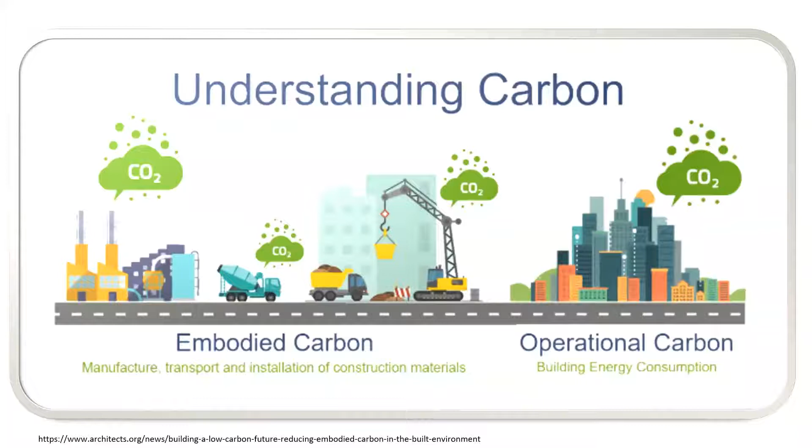Okay, so when we talk about EPDs, what they are is labels. It's considered an eco label that quantifies environmental information about the life cycle of a product or even a service, and it's designed to enable comparisons between products that fulfill the same function. It's often referred to as an environmental nutrition label for a product, defined under the ISO 14025 standard.

EPDs are independently verified, and that's an important component. The overall process for developing EPDs, the international standards they're based on, as well as the product category rules, are very clearly transparent and identified, and then the process itself is verified.

Now, another important footnote when we talk about materials that fulfill the same function: one of the key caveats is that the materials have to fall under the same set of product category rules, and that is a really important area in terms of pavements, because there's a different PCR for asphalt mixtures, ready mix concrete, and interlocking concrete pavers.

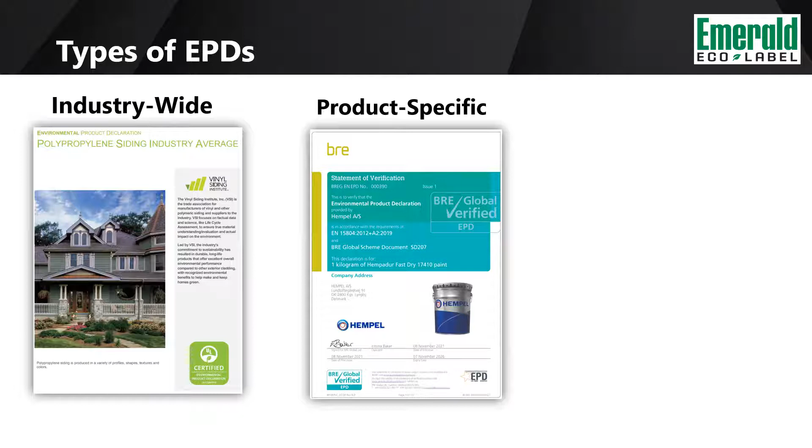The next example is going to be a product-specific EPD, and this one is a paint made by Hempel. This is a particular product that's made at a couple of factories around the world. And so this EPD is an average of those two factories, but it does apply to this specific product by the specific manufacturer.

And then the third type is a product-specific and plant-specific EPD. This example is one of my favorites because, boy, I wish I had a private jet that I could say I've got an EPD for, but this is an EPD for a specific product, a specific model of jet manufactured at a specific facility. And when we talk about EPDs for asphalt mixtures, these are going to be both plant-specific and product-specific EPDs. Similar to, but not quite as exotic as the private jet.

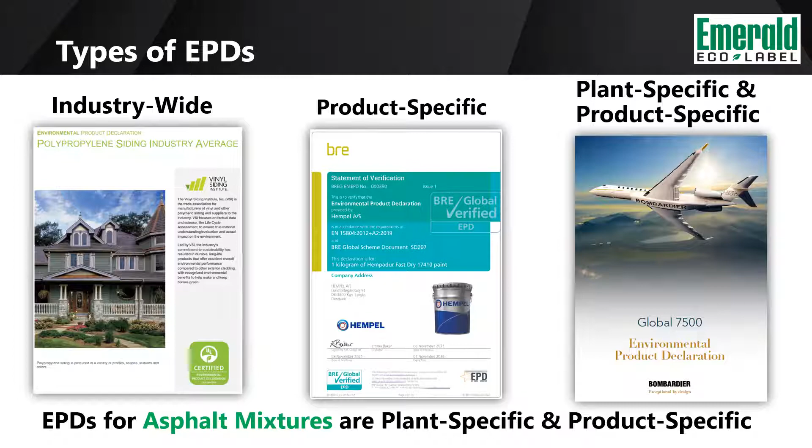So the scope is an important part of the EPD. What is the scope? It's not just the plant operations. That's fairly easy to calculate. But it's a full life cycle inventory over the scope of cradle to gate. So that means upstream processing of raw materials, transportation of those materials to your plant, and then plant operations themselves.

And when we talk about upstream processing from the cradle, for aggregates this is simple in terms of crushing and screening rock, blasting it out of the ground and all that sort of thing, and then the manufacturing process. On asphalt binder, the supply chain is more complex. You've got petroleum extraction out of the ground, transporting that petroleum to refineries, refinery operations, transporting finished binder to the terminal operations. So all this stuff is included in that upstream A1 portion.

And hold on just a sec. My 3-year-old wants to say something. Okay, sorry about that.

Okay, so the other life cycle stages beyond that are not included in the EPD, mostly for a couple of reasons. One is ISO doesn't require you to go beyond cradle to gate, so that's the basic. And the reason for that is the manufacturer or mix producer doesn't really have a lot of control in most cases over these subsequent life cycle stages. You end up having to use scenarios to model what happens beyond the gate of the plant, and it ends up being pretty generic information and not very insightful in the world of pavements.

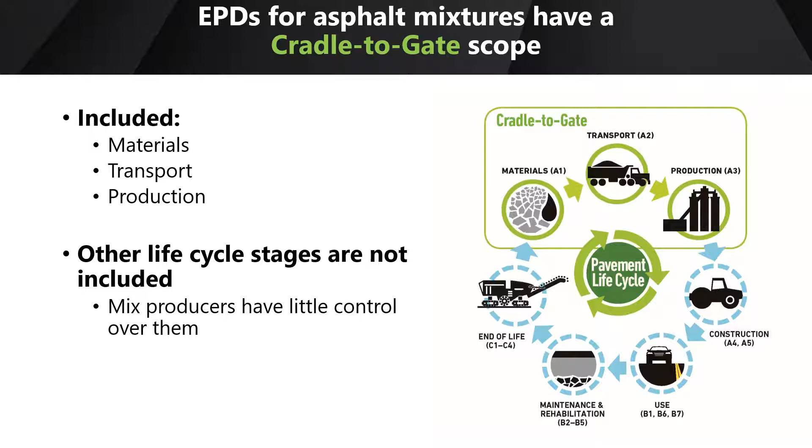But if you want to do that analysis, what you can do is use your EPD as a data source and plug that into a full life cycle assessment. So the manufacturer is providing those upstream portions, A1 through A3, with their EPD, and then an agency or researcher or whomever can fill in the assumptions for a particular pavement design, rehabilitation technique, or whatever it might be, to fill in those other life cycle stages.

So the one that's gaining a lot of attention right now in our space is FHWA's LCA Pave software. It's not software technically, it's an Excel file, but it's designed for agencies and for academics and researchers to be a relatively simple LCA software solution, so that folks can start conducting LCAs on pavement materials and pavement designs. And importantly, LCA Pave was designed from the very bottom to be able to take EPD data as an input to those full LCAs that folks might use for different analyses.

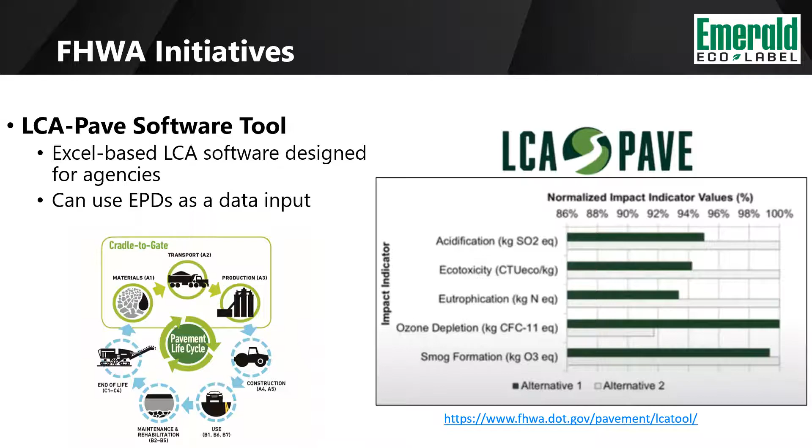So the other thing I want to mention, the last thing on background about EPDs, is we use it mostly to look at embodied carbon, or that portion of embodied carbon associated with construction materials themselves.

But it's more than just that carbon or global warming potential that's reported in an EPD. There are dozens of different impact indicators and resource use indicators and other pieces of information that are reported in the EPD. Some examples include things like acid rain forming potential and smog forming potential. And as a kid growing up in the 1980s, I remember a lot of concern about the depletion of the ozone layer. And that is mostly being solved right now because of global treaties and whatnot.

But there is information about those types of environmental impacts, and also a lot of information about resource consumption, energy consumption, recycled materials use, non-renewable energy and renewable energy use, even use of fresh water, for example. So EPDs have a lot of information. It's not just a carbon footprint.

That gives you an opportunity to look at trade-offs. Sometimes you may reduce one impact, but have an increase in another impact. And sometimes you have solutions that reduce everything. So it's really beneficial to be able to see those trade-offs.

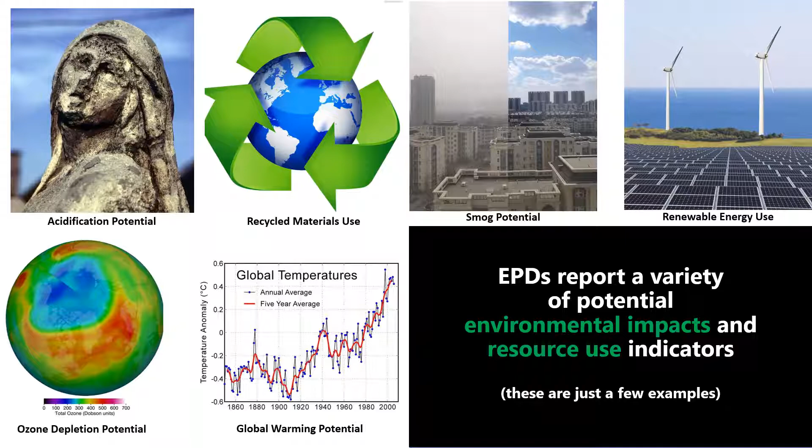So now I'm going to get into what I would say is the exciting part of this presentation, which is what's going on with policies and programs out there by owners and other agencies. And I always like to start this with the LEED program, because U.S. Green Building Council's LEED program was the first player in this space. When they developed the LEED version 4 standard, which went live around 2018, but they were developing it around 2013 or 14, they said, we're going to start requiring EPDs as a credit requirement. So there's a point you can get for a LEED project as a building owner or project team if you collect 20 different EPDs from 20 different products for your building.

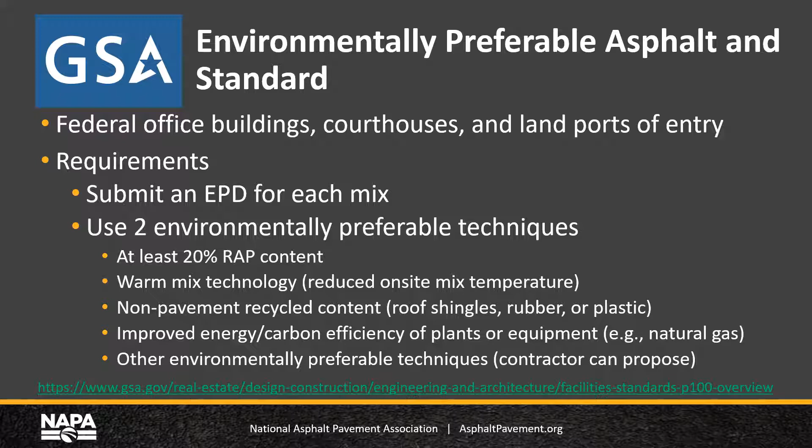I think it's a fairly good standard. It pretty well reflects where we are as an industry as far as being able to provide EPDs. It's not that hard to do. So you can do that for GSA. It's really kind of developing best practices at that agency level.

The other thing going on within the federal government associated with Buy Clean policies is with that executive order that I mentioned earlier, the White House Council on Environmental Quality, or CEQ, established a Buy Clean task force. They've been meeting for almost a year now. And what that group is doing is they're coordinating policy recommendations across federal agencies. So GSA is involved, and I've talked to GSA folks about this, they've certainly shared what their policy is with the task force and the other participants.

Federal Highways is involved, and from what I understand they've been fairly influential, which is, I think, a good thing. And then other agencies like EPA, Department of Defense, national parks, federal lands, all that sort of thing. We're expecting, I would say soon, some sort of policy recommendations out of this task force, but we don't have any clarity on when that will be, and we have no idea what is going to be included in those policy recommendations, but it's what we're keeping a really close eye on.

So then you have the bipartisan infrastructure law, and if you've been paying attention to this space, there's a number of new grant programs funded under that legislation. So these are grants that state and local agencies can apply for for transportation infrastructure. And most of these, when you look at the notice of funding opportunities that went out, they said they're looking to fund projects that incorporate lower carbon pavement and construction materials, and projects that use recycled materials or materials that reduce or reverse carbon emissions and that sort of thing.

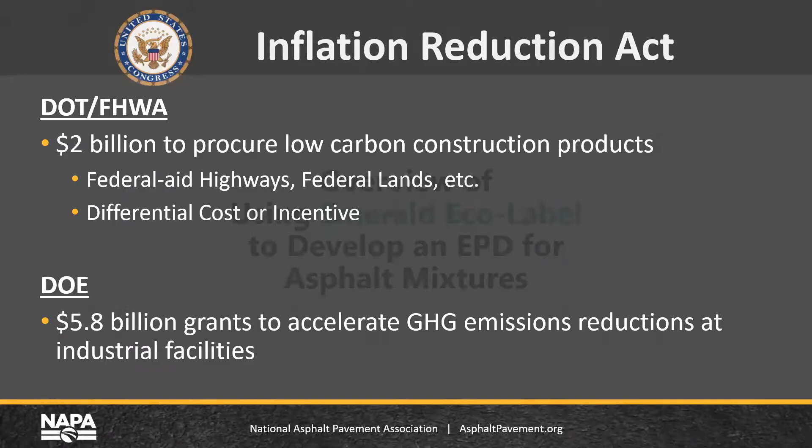So that's all what's going on. There's a lot going on, and there's even more that I'm not talking about because it's still in the planning stage and we don't really know what it's going to look like.

So let's talk a little bit then about, I'm just going to do a quick time check. Okay, I think I'm good.

What does it mean for someone to actually develop an EPD as a mix producer? And I'm going to cut straight to the chase on this. What we've done at NAPA, we have a full program, and there's a lot more embedded in this with development of product category rules, identifying a program operator, developing the underlying LCA. I'm just skipping over all that stuff. I could spend 20 minutes talking about it, but right now that's all you get. But what we've done after doing all those things, we put together this Emerald Eco-Label software.

This is a software tool for asphalt mix producers that allows them to very easily and very cost effectively develop verified EPDs. So the EPDs are going to be plant specific and mix specific. So this is for this particular mix design coming out of this particular plant. Can use it for pretty much any asphalt plant in the US.

We have a limitation right now with portables, but we're going to be working on getting that functionality put up in the near future. And then the software itself is independently verified, and we have the ability to audit the data that's in there. So there's a lot of veracity as far as what's going on and what the outputs of the software look like.

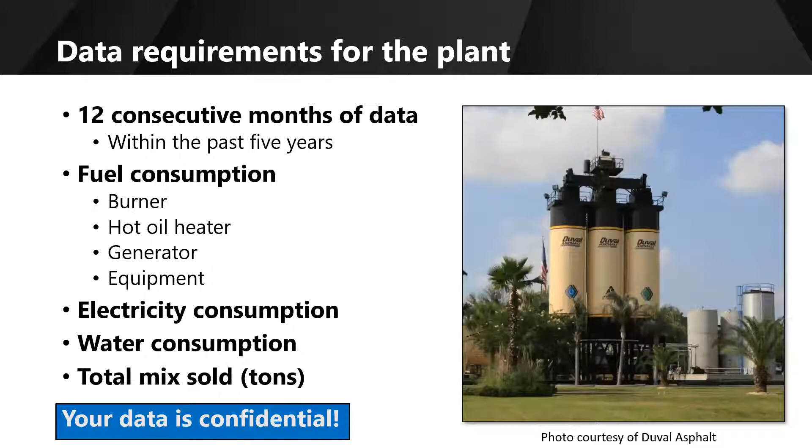So when it comes to the mix design, you input all of your suppliers and your materials, and you're going to input things like, well, what's your mix design to start with? How much aggregate, how much binder, how much recycled material, and do you have any additives? This could be your polymers, this could be your warm mix additives and liquid anti-strips and fibers and all that sort of thing.

And then importantly, where are those coming from? How far away from the plant are they? And what's the transportation mode? We have locations that bring in aggregates and binder as well by train or by barge or by ocean vessel. So we have data sets for each of those.

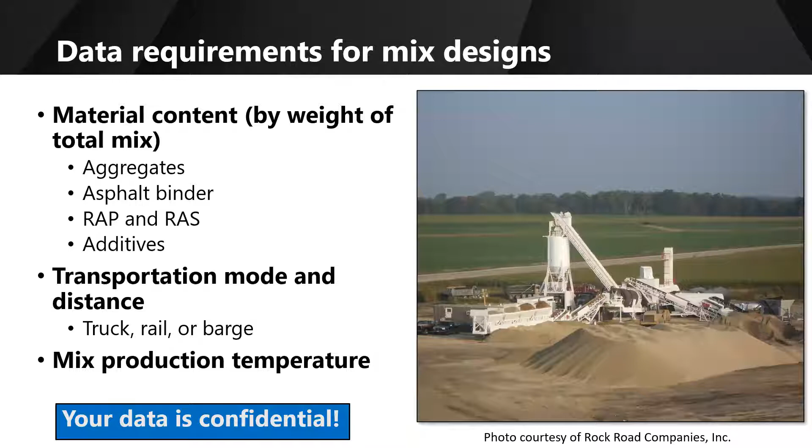We also collect the mix production temperature. We don't actually allocate energy at the plant based on the mix production temperature, so it's just going to be one number across the board. But in the name of transparency, we do report what that mix production temperature is, so the customer can see that.

Now, when we talk about all this data, the important thing here is that there's a lot of upstream underlying data in here for things like asphalt binder and for aggregates and for energy, right? These are very common materials. Everything that we're using is being pulled from the federal LCA Commons, which is like a central repository of public data sets. But we're missing data for a lot of additives. We have some data for like SBS polymer, for example, but some of the binder additives and mix additives, you're going to find data gaps for these sorts of things.

If you have a data gap material that's more than 1% of the mix by weight, you can't develop an EPD, and the example of this would be slag aggregates. I know the slag industry is working to fill that data gap. That's probably the biggest example. Or if you're doing cutbacks, we don't really have a data set for the cutback asphalt side for a cold mix, for example.

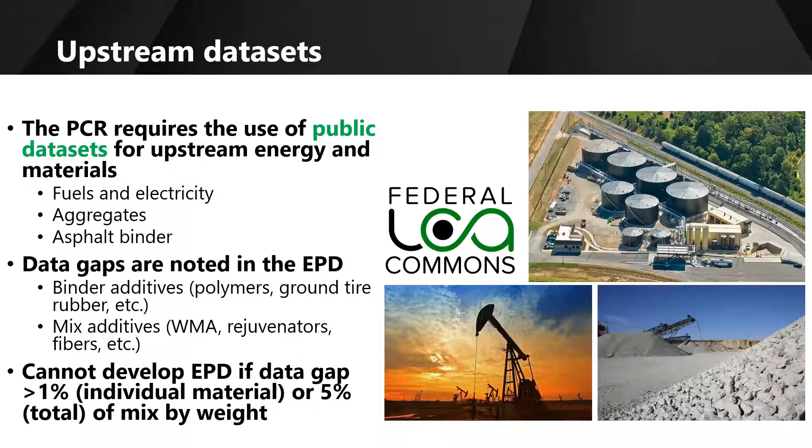So we're seeing interest broadly. We're seeing interest grow pretty rapidly by the industry. And this is in the first 5 months of this version 2 of the software that we launched in April.

We have exceeded the previous 5 years of published EPDs, actually more than doubled the number of published EPDs from the previous 5 years. So I'm going to stop here and turn things over to Richard, and he's going to talk about kind of what the future looks like.

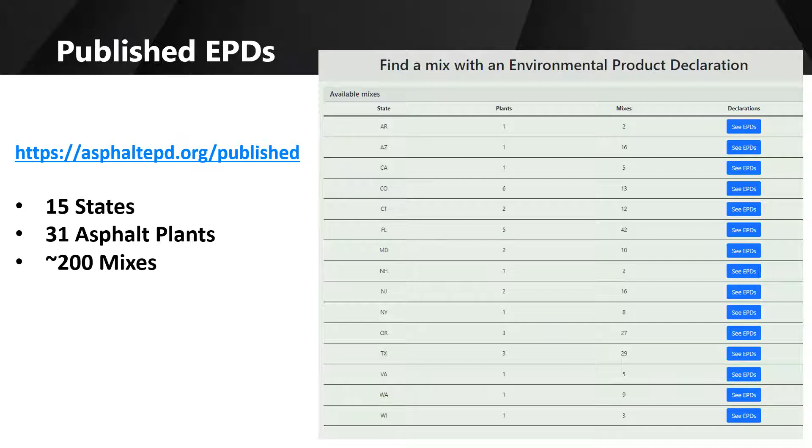One thing I will say about the last slide, just briefly, is the thing to focus on is that's published EPDs. There is an option for plants to create EPDs, but then not publish them. So there are more than just 31 plants across the country that are actively using the software, but some of them are figuring things out and learning a little bit about the program before they actively go out and start publishing EPDs. And so just because you may not see your state up here doesn't mean that it's not being used.

And so, like I kind of mentioned earlier, the state of this is changing rapidly. And one of the jokes Joseph and I commonly make is when we're doing presentations on this, we really can't send presentations too far ahead in advance, just because you never know when a piece of legislation or a policy statement is going to come out and drop, which could impact the way we do our work and the way we talk about this. And this is going to be a constantly evolving process.

One of the things that we're doing right now is looking at data quality and data gaps that are out there, and trying to encourage people to help us create a more full picture of the program and what the environmental impacts are related to asphalt. And so when we look at our program, we admit there are current data gaps with certain additives and things like slag, and we need those data gaps to be filled.

This is especially important in areas that are setting legislative thresholds and ceilings on what your global warming potential could be. We want to make sure that when those policies are set, we can have that ability to raise those or present a more complete picture of what the asphalt mixture does.

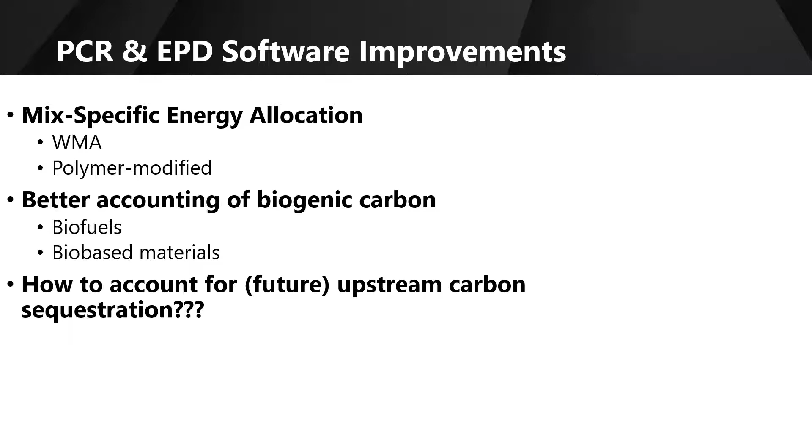I think that this area is ripe for research and specifically education. LCA for pavements is, I call it, a relatively new science. It hasn't been around two decades where people have been doing a lot of hard and fast research on it. So we need to grow intellectual capacity and expertise. And this includes in academia, in DOTs, and for industry as well.

We need to look at things like software development and bringing more and more transparency into these systems. The great thing about our product category rule is you can actually go to it and understand every single assumption that is made through the course of calculating the environmental impact of an EPD. And that's not necessarily true for everything that's out there.

We also understand that right now the EPDs don't account for the use phase, which if you have a high volume road currently, that may be a major driver in terms of emissions through things like pavement vehicle interaction. However, we also know that's complex, and things like traffic and understanding fuel efficiency of vehicles and how that's going to work over the next 50 years is a very, very challenging thing to predict. And so looking at those models and tying them to reality and then understanding what kind of prediction mechanisms we can have is an important area for us to research and do education on. And if you want more education on that, NAPA will be doing a webinar on that this fall.

The other thing is buy clean policies and EPD policies are spreading quickly. And while you may not think your legislature is going to be the one handing it down for you, it is soon probably going to be attached to federal dollars. And that may be through a federal lands program, National Park Services, or GSA, or even your state highway funding potentially in the future as an opportunity to get some additional funding. And the IRA is going to accelerate the demand for low carbon materials, and it's important to have those conversations.

So there are some things that we can do right now to reduce emissions. There are existing practices and technologies which are available. Sometimes it's going to require specification changes to do that. Sometimes it's going to take contractors looking at their operations. But emission reductions are possible. And if you look at the recent greenhouse gas inventory that we published, you can get that for free on the NAPA SOAR website. It shows you some of those opportunities.